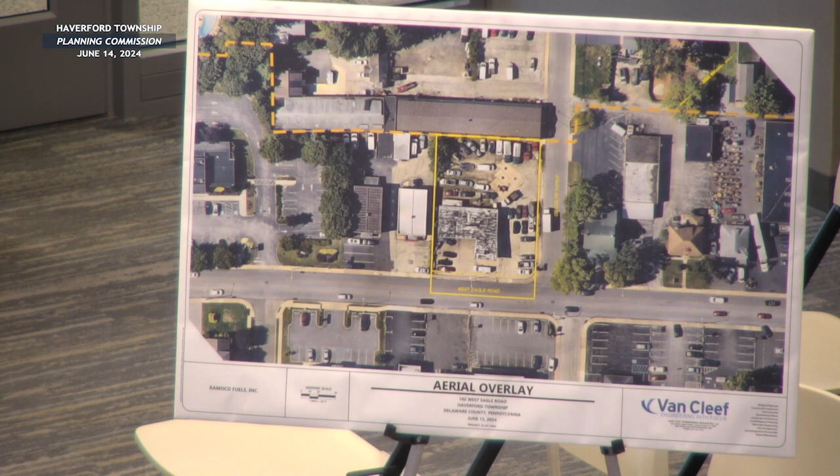The idea with this would be to remove the existing canopy and take down the existing service station part of the site, and reconstruct a retail building kind of towards the back corner, reconstruct the canopy over the two existing pumps, as well as add two pumps. We would also add parking, which would be defined and delineated by curbing and striped to spruce that up and to provide a more readily available, well-defined traffic pattern around the property.

You can see the two openings that would remain. Again, this one along Grassland would be moved closer. This one along West Eagle would also be moved a little bit closer to the intersection to provide ingress and egress and access to the parking along both sides.

You can see the green on this plan - that represents the area that was impervious that would be converted to landscaping of some sort or the other. Overall, we're reducing impervious coverage by about 4,000 square feet, going from 100%. This plan shows it being reduced to about 78% impervious. It's still a little above the ordinance requirement of 75%, but it is a reduction of an existing nonconformity and gets us closer to that threshold.

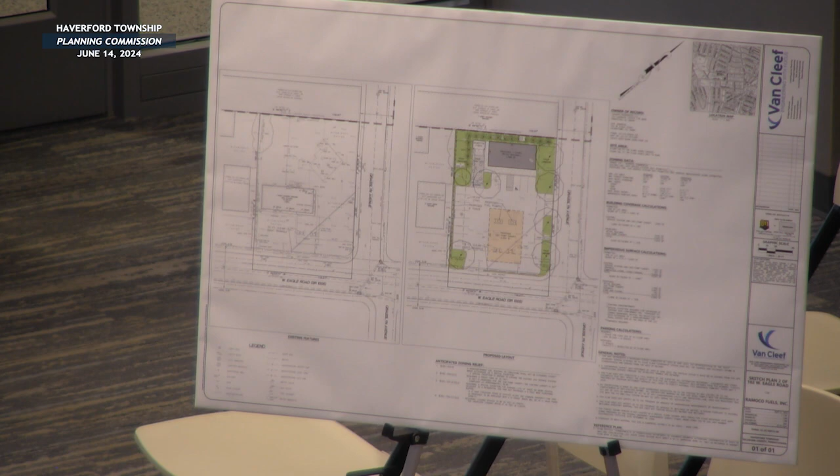And also, you said you had 2 uses on the site right now, one being a gas station and one being a commercial use? The gas pumps and the auto repair. It is an auto repair, okay. Yeah, the building's got 3 garage bays for auto service, auto repair.

Okay, and again, I'm brainstorming this with you, but if a truck comes in to put gas into the storage tanks, how big do you think that truck's going to be? They're usually semi-trucks, WB62s, WB67s. That can be arranged to be off hours, so it's reducing congestion. We would be moving the gas tanks over to the upper left corner, so a gas fueling truck could back in, unload, and then pull out.

And deliveries made to the convenience store would be through the front door, right? I don't know if it'll be the front door, the loading area on the side. There might be a side door that would be added as well. Okay, and I think deliveries generally would be off hours as well.

Gut reaction, the site seems to be kind of tight. I know you're asking for our thoughts. It seems like it's very tight for what is being proposed.

Thank you. How many, you talked about 4 pumps. How many fueling locations are there? 8? Okay, 8 dispensers. So it's really 4 pumps, each pump has 2 dispensers. I was educated on that just when we started working on this. We've done a few gas stations over the last couple of years, and that was one of the first things I was educated on. But yeah, it's 2 dispensers per pump.

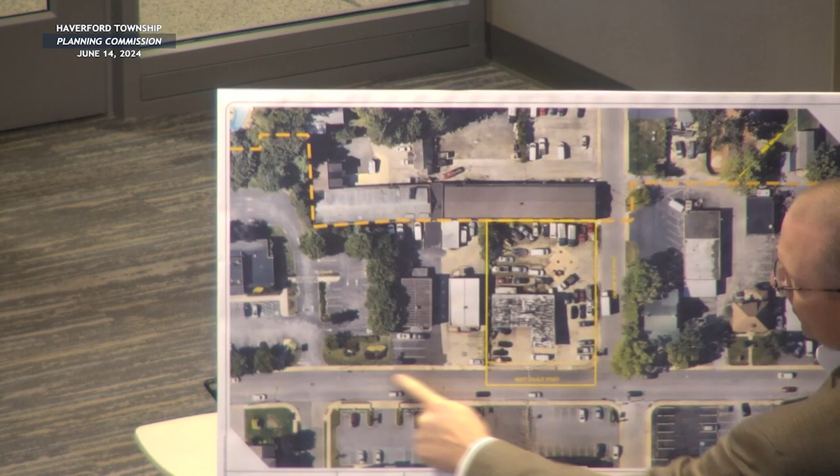All right, so then sidewalk is being maintained around? Yes. So there's not, it'll be installed. Yeah, so there's existing sidewalk out there today, but it runs adjacent to the curb, and you can see it all the way down Eagle Road on both sides of Grassland. So the plan as of now was to provide a little grass strip on the back side of the sidewalk, but we'll have to take another look at that and see how we can improve it based on the feedback.

So we were clarifying before, so there's currently 2 gas pumps, 4 dispensers then? Okay, so I'm just thinking about the number of vehicles, so you could have 8 vehicles parked at the pumps, and then 8 plus 5 parking spaces. Is that the minimum necessary parking for the retail area? Ordinance requires 9. So you're adding a few extra parking spaces. More parking than you would need, okay.

Do you have a sense of the breakdown of your anticipated retail sales, convenience store versus the pumps? The purpose of my question is, are the 8 dispensers the driving component for your financial considerations, or is the convenience store the financial consideration? Because if the pumps are just extra and the main income is coming from the retail, do we need that many pumps? I'm considering this because of the orientation of the pumps, being parallel to Eagle Road.

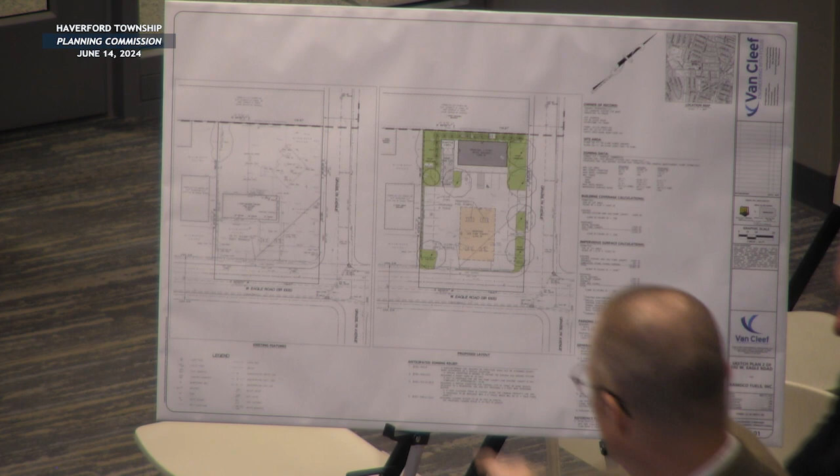Regarding the breakdown and the value of the pumps versus the retail, I'm not the one who'd be able to address that. I don't know if Matt or Dave would be able to at this point in time. But in terms of traffic, we are moving this intersection, this entrance, a little bit closer.

Still, these two pumps are staying where they're at today, so we're not moving them. I couldn't see which two. The two closer to Eagle Road. Those two are as they exist. They'll be cleaned up and spruced up with new dispensers, but location-wise, they'll be where they are.

And I do appreciate that you're proposing to clean up the site. My earlier comment was simply, I don't appreciate being threatened by non-action, so I appreciate the efforts here. And I'm not opposed to the redevelopment, the use of the site.

It's a common thing. So in terms of the other gas stations, we were saying there used to be more on Eagle Road. So what is your service area here? And from a proximity standpoint, what other gas stations are you trying to reach?

Yeah, that's more the marketing end, more the financial end of things. That's not in my bailiwick. I just draw what are hopefully pretty pictures and design it to township standards. Unfortunately, I don't have an answer for you.

The closest one is on Library Road, right below Eagle. There's a gas station there, down the street, south on Library Road, in the triangle. They charge a lot of money for their gas. I'd be curious to know why that happens. There's also a Sunoco station down at the corner of Westchester Pike and Eagle Road.

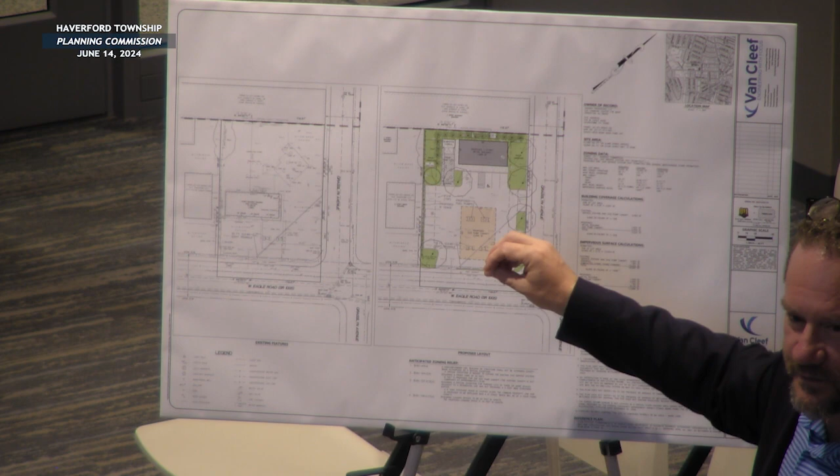The convenience store doesn't really do a lot. Arguably, I would think $5 or $10 grand isn't a lot. So it's a combination of both things that have to work, the whole thing to work.

The other kind of design thing, I'm not sure it'd be as nice, is that we've been doing ones where we have the pumps on either side, and in the middle we'll put the building. It won't be like a huge building, it's a center island kind of thing, pumps on either side—you've seen those designs. It's another idea, and maybe we could work on a sketch to show you guys too, just to see ultimately how the site circulates, if it circulates better.

Certainly that would eliminate any setback issues, even though Scott was creative enough to create some more buffering. So those are some of the things, and depending, that might even get our convenience store smaller, so less parking would be needed.

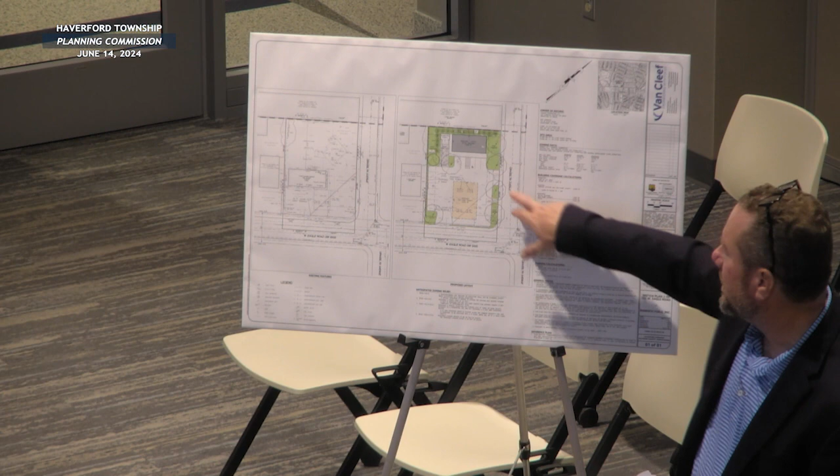Part of me thinks if PennDOT says left turn only, no right turn, we can still make it work. I just think with the second curb cut, if you don't control it, people will decide to go wherever they want. I'd rather not give them the option.

Okay, one last question from me. Are there any environmental issues with the existing tanks? With the existing tanks, I hope not, but you have to open up the ground to find out.

So you haven't done anything yet? No. Thought it was already done. But yeah, whatever's there, because we're taking them out. Well, yeah, we're going to relocate. So whatever needs to be done for that has to be done.

Are you guys familiar with the underground storage tank fund, USTIF, as it's called? There's a statewide insurance fund, it's a tax on gas that we pay when we buy gas, which goes into an insurance fund, so users of stations aren't left exposed. If there's a spill, we call this insurance fund, they come out, evaluate it, and they actually pay up to 80% or some enormous amount. So we're not afraid of that.

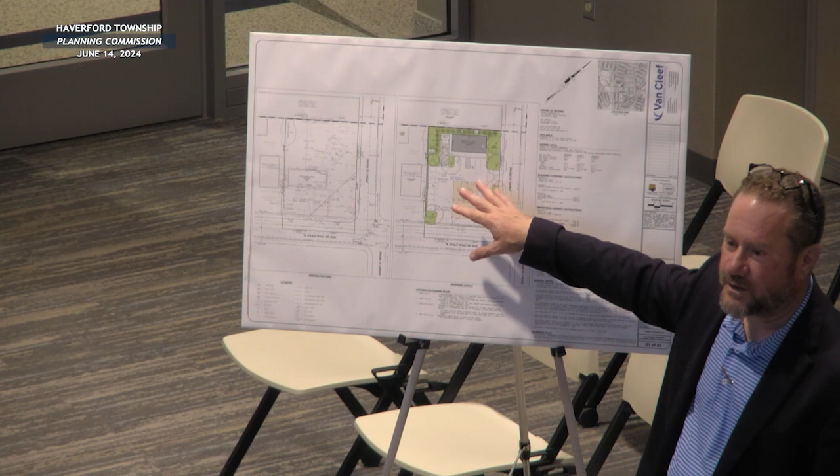So if we found a tank leaked, or found out there's cleanup needed, or some soils had to be removed, there's already money there for that. Also, Getty would be responsible for the contamination, since it was Getty, or former Getty.

So I want to offer my apologies for getting a little crazy in the beginning. I'm looking forward to Father's Day, and my son's coming home from college, and I'm getting kind of excited to get into my weekend, so I apologize if I was a little abrasive. But I'm glad we got into that conversation about what you could see, what you think can happen, what things you'd like to see revised. Might be too tight, maybe we have to eliminate something or redesign it to make it work a little better, but we do appreciate that feedback. It really helps us. You guys understand your community best. We're here as visitors, so to speak, so we want to do it in a way that's going to be a benefit to everybody.

And what's your plan for the zoning hearing board? Are you waiting to get final feedback before you guys come to terms on a design? Okay, then we'll determine what relief we need and take it from there.

I think also when we get to a design that works, I probably want to have the engineers at Scott's firm talk to Pannoni and see what we'd have to do for stormwater management, so we can make sure that'll work. Because when I go to zoning, I want to tell them I could do everything. I don't want them to have questions either. No offense, but I want to take advantage of you guys as much as we can, get as many of these questions answered, and then say we could support it. We go ahead and see if we can get the zoning relief.